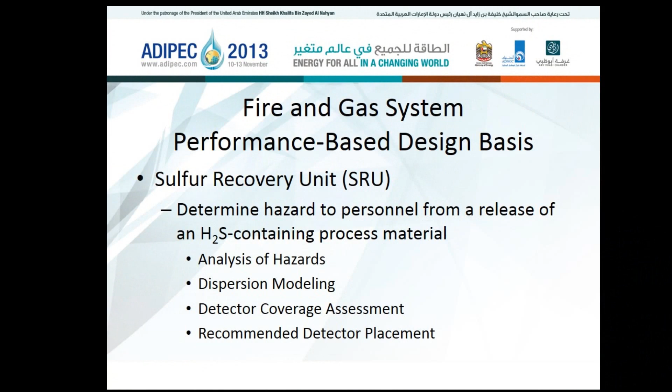When designing systems in accordance with the ISA Technical Report for Fire and Gas Systems, you are performing what is called a performance-based design basis. So you're using targets. You're selecting performance targets and then verifying that these targets have been achieved. And we're going to be doing this for a sulfur recovery unit. And sulfur recovery units are quite hazardous. They're used frequently within the oil and gas production industry and the oil refining industry to remove sulfur from hydrocarbons.

Well, that's what needs to be done in industry, and then the sulfur recovery unit takes a stream called acid gas, or a waste stream that contains a lot of hydrogen sulfide, which is a very toxic chemical, and converts that hydrogen sulfide back into elemental sulfur. So in order to determine the overall risks posed by this facility and how the fire and gas system helps to mitigate those risks and the performance of that gas detection system specifically, we're going to need to perform an analysis of the hazards, and that's going to include some dispersion modeling.

And then we're going to look at the detector coverage, how the detectors are laid out initially, and then what our final recommendations are. And then compare the results of the traditional method, which is what was used for the original design, kind of using rules of thumb and expert judgment, and compare that against the placement that was calculated using performance-based methods.

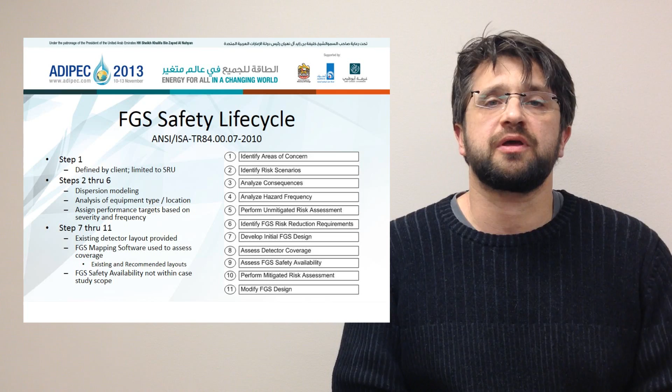We executed this project in accordance with the ISA 84.00.07 safety life cycle. That life cycle contains 11 steps for designing, and if all these steps are executed properly, that should result in a functionally safe fire and gas detection system. The first step is identifying the areas of concern, and basically that was limited to the sulfur recovery unit. That was our scope of analysis. All of the equipment items in that unit were considered to determine whether or not fire and gas detection was going to be required for that equipment.

For steps 2 through 6, we performed dispersion modeling. We analyzed each piece of equipment. What type of equipment is it? Where is it located? And then based on that assessment, we assigned performance targets that were a function of the severity of any releases that might result from that equipment and the frequency at which those releases can occur.

Steps 7 through 11, we took a look at the existing detector layout that was performed using expert judgment and other design heuristics. And then we used the Kenexis Effigy fire and gas mapping software to assess what level of coverage was provided. And we did this for an existing case and also for a recommended case.

Now, within the scope of this study, the client that we performed the study for was not really interested in assessing the probability of failure on demand or the safety availability of the fire and gas system. So that's not going to be part of the case study that we're discussing today. Hydrogen sulfide is the key chemical in this process that we are concerned with, and we want to make sure that the employees at this facility are not exposed to this chemical.

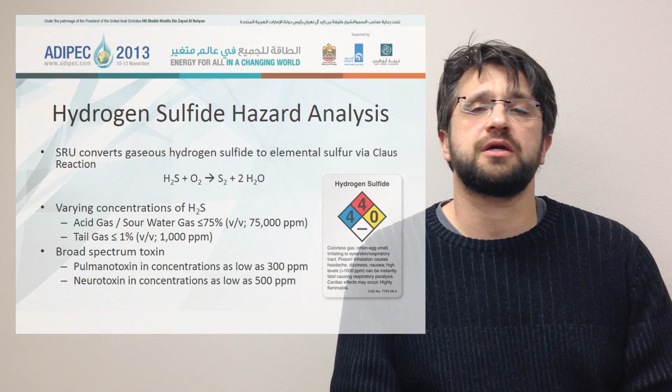So low concentrations of this chemical can have very, very adverse effects to employees and any people in the surrounding areas. So making sure that this chemical is controlled and that releases don't occur, and if they do occur, that they're quickly detected and mitigated, is going to be very important.

We started the analysis by creating design basis scenarios. In a design basis scenario, we're looking for design basis hazards where a release is at an incipient stage in the gas cloud development. At that incipient stage, we want the gas cloud to be detected to allow personnel egress. The predominant H2S containing streams that we looked at were acid gas streams, sour water stripper gas streams, and the tail gas streams. So those were the three different types of releases that we modeled.

When we did our modeling, we used several different equivalent hole size diameters to represent the range of leak sizes that could occur. For acid gas or sour water, we were concerned with a 5 millimeter hole size being our incipient leak. And for tail gas, we modeled 25 millimeters because of the lower concentration of H2S in the tail gas stream as opposed to the acid gas and the sour water streams.

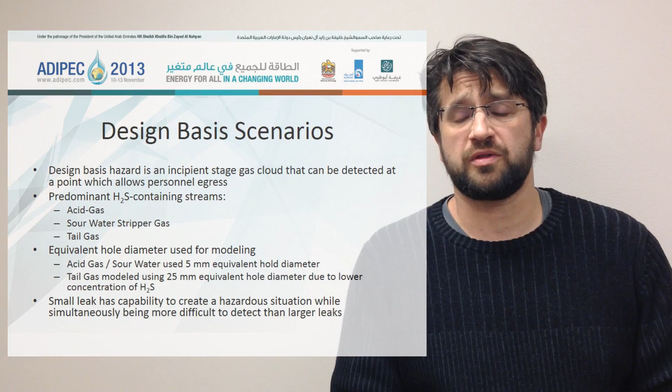Okay. Small leaks have a capability to create the hazardous situation in areas where the concentration of H2S is higher, whereas larger leaks are going to be required to create a hazardous scenario for less concentrated streams. But in either case, even for the most concentrated stream, a small leak is going to create a smaller cloud, and thus it's going to be harder to detect. So you need more detectors to detect a smaller leak than you do to detect the larger leak. Thus, if you're appropriately covered for small leaks, you will inherently also be appropriately covered for larger leaks.

After we designed the design basis release scenarios, we estimated the consequence beginning with performing dispersion modeling. So for each one of the design basis scenarios, we looked at the concentration of H2S in the material that's being released, the temperature and pressure at which the material is being released, hole sizes, and the ambient weather conditions at the facility. We did this modeling using similarity dispersion models.

Specifically for this project, we used PHAST from DNV, and that's an example of a similarity dispersion model as opposed to something that would be more complex like computational fluid dynamics, which would be required indoors, but we felt that the similarity dispersion models were appropriate for the relatively widely spaced outdoor facility that we were analyzing.

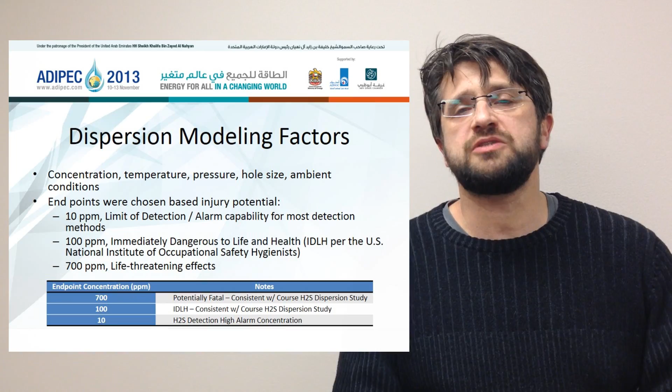Also, we modeled the gas cloud sizes to 10 parts per million, and the reason we modeled that is the gas cloud size that is detectable. So the 10 parts per million is going to be our alarm set point in our gas detection system. So that gas cloud size is going to represent the size of a cloud at the limit of detection or alarm capability for most detection methods that are capable of detecting H2S clouds.

After all the dispersion modeling was done, we created a table to show the results of the dispersion modeling. As you can see in the table, there are 5 of the scenarios that were modeled for the study. For each one of those models that was run, there's a description of which scenario specifically it was, the release rate, the duration of the release, and then a demonstration of the distances to the end point for the injury, which is 100 ppm, and also for detectability, which was at 10 ppm.

And you can see that the gas cloud size that is detectable is significantly larger than the gas cloud size that can cause injury. So for the first scenario, which is a 5 millimeter leak of acid gas, you'll see that the distance from the leak point where an injury can occur was 100 feet, whereas for that same release, the distance at which a gas detector would go into alarm because of the release is 540 feet.

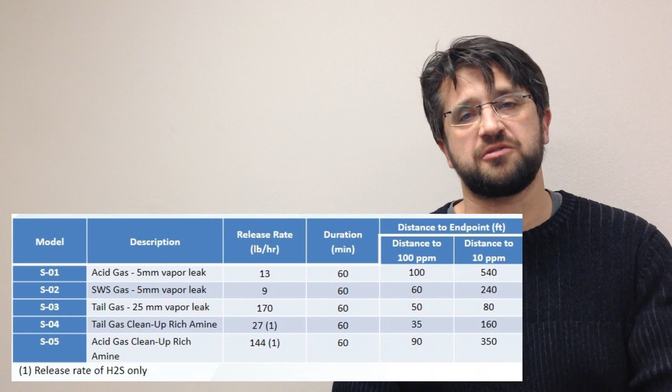So the gas cloud length that is detectable is more than 5 times greater than what can cause injury, and what is expected to cause fatality is even much smaller still. This is the reason that we need to model the detectability gas cloud in addition to the injury size gas cloud, because you're much more detectable than what will cause injury.

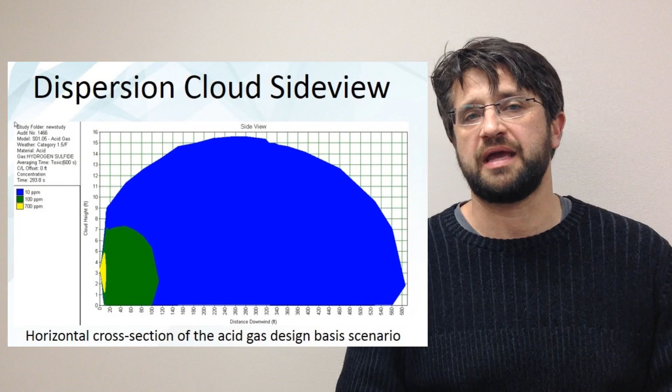As part of the output of the project, we generated different views of the acid gas release scenario to help illustrate the size and dimensions of the gas cloud. The first view that you'll look at would be a dispersion cloud side view. So we're going to look at the side of the cloud to determine how highly elevated it will be at the different distances downwind of the release.

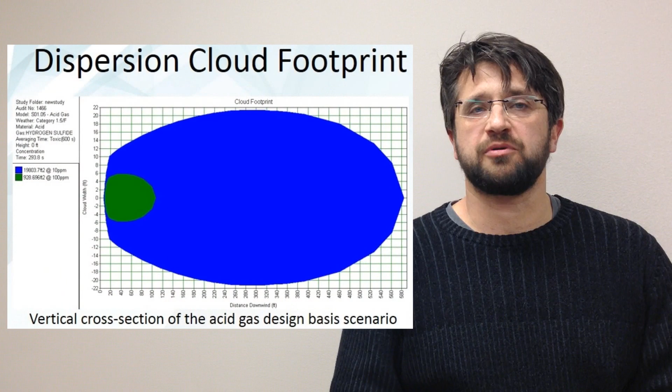The second view that we considered in our analysis and in our reporting is a more common view, which is the footprint. So this would be a representation of the gas cloud looking down from above. And that would represent the area on a plot plan that the gas cloud would cover.

Okay, the dispersion modeling that we performed and the subsequent risk integration that we're going to do inside our Effigy fire and gas mapping software is going to account for wind speeds and atmospheric stabilities. So we were required to obtain a wind rose to look at the different wind speeds and wind frequencies of the different directions at this particular site.

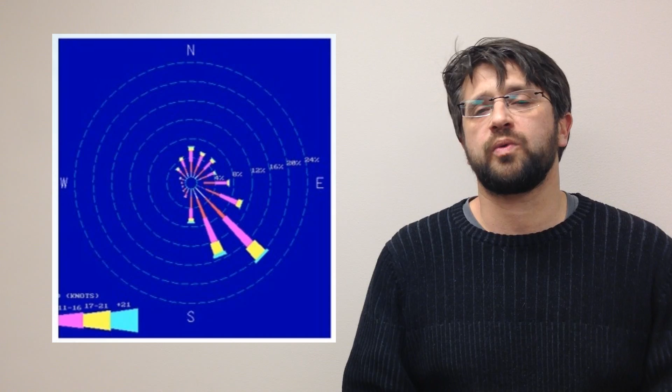Now, toxic gas clouds are going to be very sensitive to wind speed, and they're also sensitive to the atmospheric stability. And the gas clouds that we showed you on the previous few figures were based on an F stability, which is representative of nighttime stability, very stable atmosphere that you would expect at night, and a low wind speed of 1.5 meters per second. These atmospheric conditions combined are what we would consider to be unfavorable and would result in a larger gas cloud.

The next part of the design basis consequence assessment is considering the frequency at which releases will occur. Frequency assessment for fire and gas mapping, performance-based fire and gas analysis, is not a predictive process, it's a statistical process based on past releases. So we're not going to do a LOPA to try to calculate or estimate how frequently we expect the leak to occur. Instead, we're just going to use databases of equipment leak rates to determine what has happened historically.

And although the leak rates are equipment based, we're going to sum all of the different equipment items up that would generate a certain type of design basis scenario. So as you can see, we've created a table where we look at the different types of equipment and the scenarios associated with those equipments and assigned an appropriate release frequency representing that equipment type.

Based on the risk analysis that was performed, we assigned performance targets, or what are referred to as gas grades, to each of the different areas or zones that contain the releasing equipment. The gas grades define the ability of a function to detect, alarm and mitigate the consequence if necessary. We used a semi-quantitative scoring procedure and applied that procedure to each leak source.

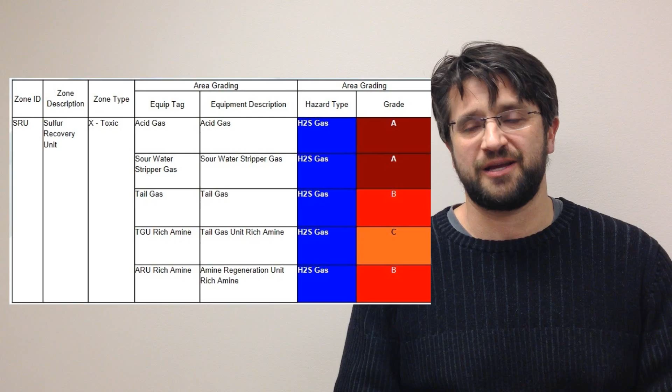Again, the performance grade determination process was performed for each section, and tables were generated using our FGS Design Basis toolkit that would assign a grade to each of the process sections, and that table is seen here. After selecting grades, we mapped all of the gas releases using our FGS assessment tool, and that tool being the Kenexis Effigy software, which is in the KISS, or Kenexis Instrumented Safeguard Suite of software applications.

The inputs into the tool include things like equipment layouts, release frequencies, dispersion modeling results, gas risk footprints that are going to be generated by aggregating the release, and then wind distributions. So we enter all of the data in, and the software aggregates the results in different ways. So we're going to look at two different types of coverage, including both the geographic coverage and the scenario coverage, both of which are defined in the ISA 84.00.07 technical report.

The first figure that we're going to look at is the unmitigated gas release, and again in the geographic coverage format. So what you're looking at is, again, the unmitigated risk profile, or the unmitigated geographic risk. So you'll see a plot that has different colors, and those different colors represent the frequency at which a gas cloud will exist in a certain location. And this figure for unmitigated risk does not include the beneficial effect of the gas detection system.

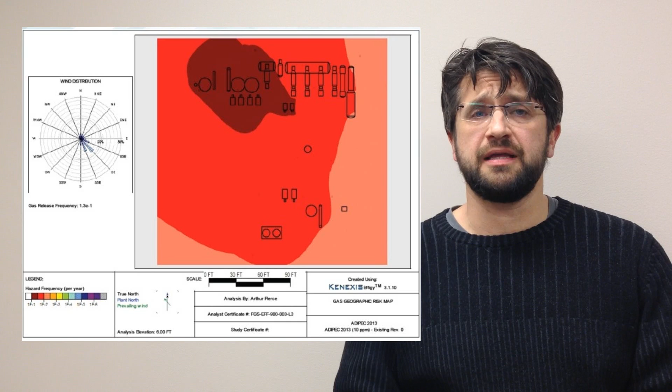So dark red would represent leak frequencies of approximately 1 in 10 chance per year. And then each color change represents a half order of magnitude decrease in frequency. So as you can see, right in the middle of the process area, there's a big area of dark red indicating that the risk in this area is significantly high. In the next figure, what we show is the mitigated risk profile.

So let me step back a little bit and explain how these figures are drawn. Each gas release is going to have roughly the shape of an oval with a certain downwind distance and a certain crosswind distance. That would be one release scenario from one point, one set of weather conditions. Well, as we mentioned earlier, we're going to be releasing material from multiple different pieces of equipment. We're going to be releasing at different weather conditions, and we're going to be releasing material in different orientations. Whether the material is released due north or to the west or to the east is going to change, and we need to consider all of the possible orientations of a release.

And we also need to consider, as I mentioned a few slides ago, the wind directions. So the way the Effigy software works is it's going to more heavily weight releases that occur in the direction of the prevailing wind as opposed to against the prevailing wind. So all of that wind rose information is also going to be considered when putting this graph together.

So each one of those ovals is an individual scenario. And what you see on this figure is an amalgamation of those probably hundreds of thousands or possibly millions of scenarios, all essentially laid on top of each other. And the frequency associated with each one of those releases for each point on the map gets summed up to generate the graph that we saw previously and also this graph.

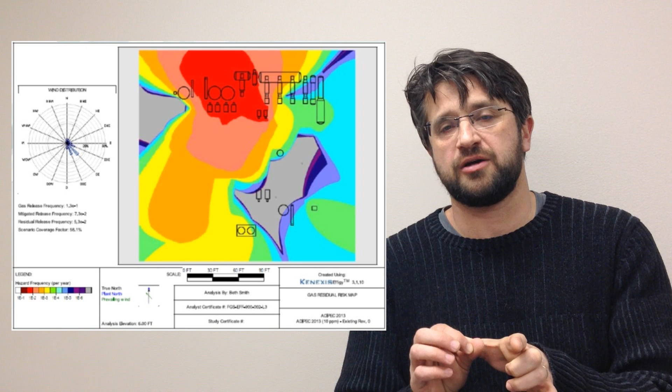But the difference with the mitigated risk graph that we're looking at now is that the scenarios that intersect with a gas detector, so those scenarios where the gas cloud is going to be detected, have been removed. And what you have left is a figure that represents the frequency at which gas clouds will exist that are not detected by the gas detection system. And what you're looking at here is the existing or the starting point for this facility.

In addition to drawing the map, there's also a calculation of what is the frequency of releases that has been detected. So with the existing 8 detectors in this facility, we were able to detect 58% of the releases. Well, unfortunately, this area was zoned as a grade A. So we need to be able to detect at least 90% of the release scenarios in this area. So the existing design, as placed by expert judgment and rules of thumb, failed to achieve the desired performance target.

As a result, we had to add more detectors and move detectors around. Well, for this specific project, part of the scope of the study was to not move the existing detectors. So we could have improved performance by moving detectors around, but instead all of the existing detectors stayed where they were and we had to add more detectors in other locations.

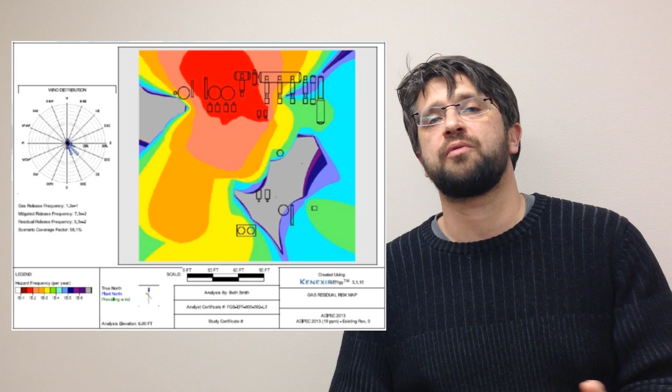So for an analyst looking at this type of drawing, you'll want to put more detectors in an area where the risk is higher. And it's very easy to see where the risk is higher by the color coding on the map. So areas here that are shown in red are going to be the highest frequency of release, and that's probably where we want to put more detectors, as opposed to areas that are already blue or purple, where the risk is probably already acceptably low, so we don't need to focus in those areas.

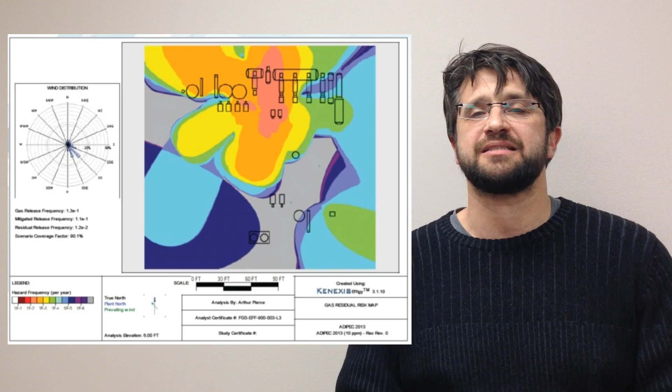So in order to achieve the customer's performance target of this zone of 90% scenario coverage, we had to move up to a total of 15 detectors, placing 7 new detectors that were not in the existing design. By adding these new detectors, we were able to increase our scenario coverage to 90%, which allowed the tolerability of risk goals of this facility to be achieved.

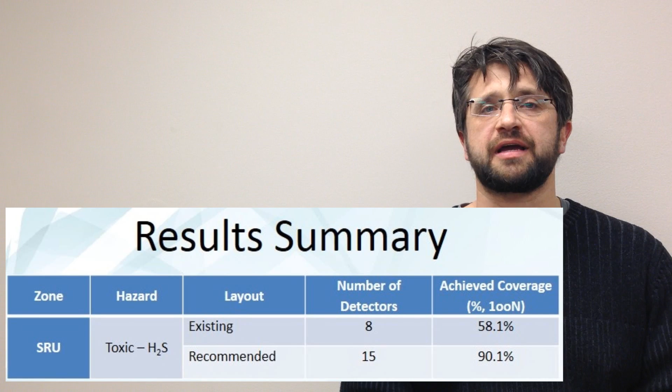In a tabular format, you can see that the results of the study showed that the existing 8 detectors were only capable of achieving a 58.1% coverage, and that did not achieve the performance target. So the recommended design resulted in 15 detectors, and that exceeded the 90% coverage target, bringing the coverage up to 90.1%.

Some things to note about the results. This case study did not include the consideration of any automatic actions being taken as a result of activation of the gas detection system. We're looking at alarm-only coverage. Again, we did not move the existing detectors around. We simply added new ones to achieve the performance targets. If we would have moved detectors around, we probably could have achieved that 90% target with fewer than 15 detectors. But that's a decision that the customer made at the beginning of the project, and that was part of our design basis. Okay. And that concludes our presentation.

Thank you for viewing the presentation, and before leaving you, let me give you a couple of references for a little bit more information. First off, I would highly recommend viewing the ISA 84.00.07 technical report, which is application of ISA 84 or IEC 61511 for safety instrumented functions in fire and gas systems. And I would also recommend reading the Kenexis case study on H2S hazard analysis and assessment, as was performed for a U.S. refinery sulfur recovery unit.